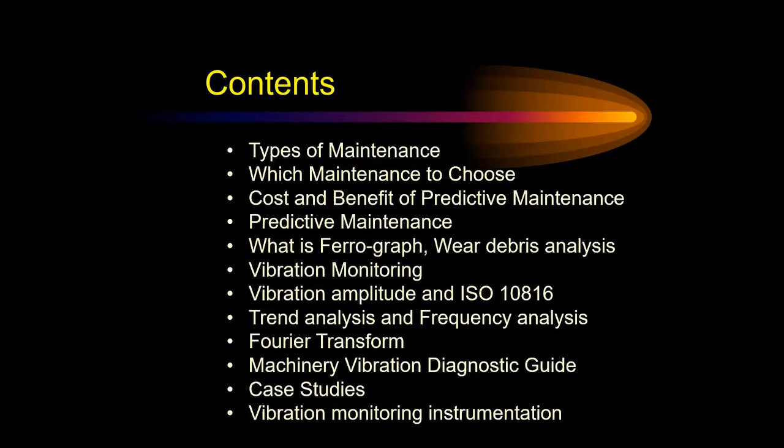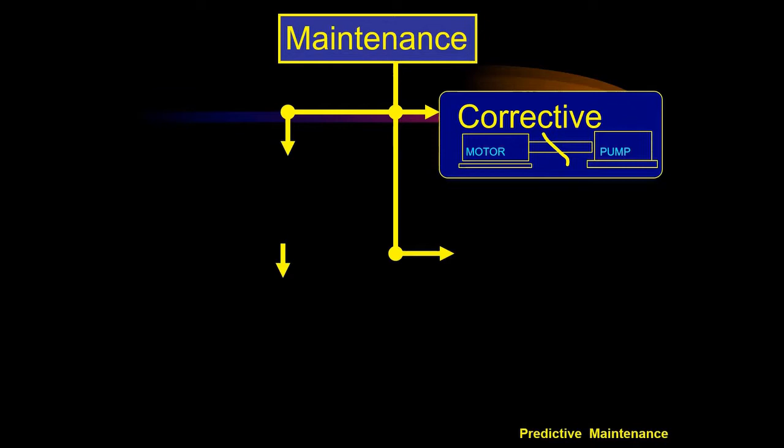Now let's see what types of maintenance there are. First is corrective maintenance, or what some people call breakdown maintenance. This means if I have a machine running, I maintain it only when it is required - when it fails, I attend to it. So this is called corrective maintenance or breakdown maintenance.

Then there is something called preventive maintenance. Most of us who have worked in the field know that we have preventive maintenance schedules. So let's say every month I will stop this machine and overhaul it, then start it again. You will have some kind of schedule for every machine - you shut it down, take it up for maintenance, and then put it back into service. This is preventive maintenance.

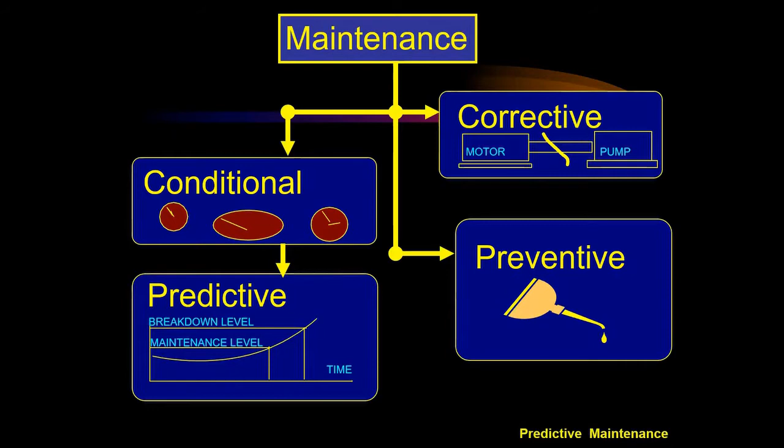Then we have something called conditional maintenance, or predictive maintenance. The idea is that you monitor the condition of your production machines, and then if required, you will maintain it. Otherwise, you allow it to run until you really have to maintain it. So these are the types of maintenance.

Now, the next question is: which machine should I choose for which type of maintenance? For example, after you finish today's webinar, you say that from tomorrow I'm going to maintain my ceiling fan by predictive maintenance.

I'm going to take a vibration meter and take a vibration reading. Your wife will say, what are you doing? Because you cannot buy a vibration meter costing maybe a lakh of rupees to maintain a fan that costs 3,000 or 4,000 rupees. So you need to know which machine should be maintained by which technology.

A fan at home is, I think, a classical example. If it breaks down, you will attend to it. Otherwise, you don't have to attend to it by any other type of maintenance. If the breakdown cost is not acceptable, or if the breakdown is important for production or security, then you have to look further.

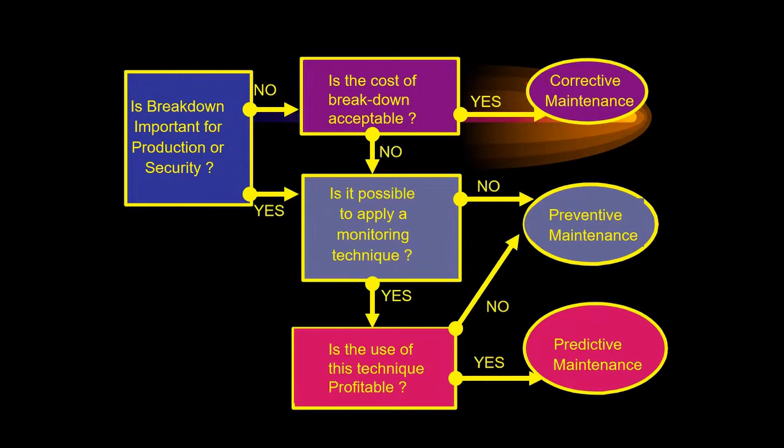Now you will have to look at the cost and benefit of any maintenance that you do. When we talk of predictive maintenance, what is going to be your cost? It's going to be the capital cost of the equipment, the training of the staff - you will have to spend money on that - and you will have to rework your maintenance procedures, which will also probably cost some money. So these are the costs involved.

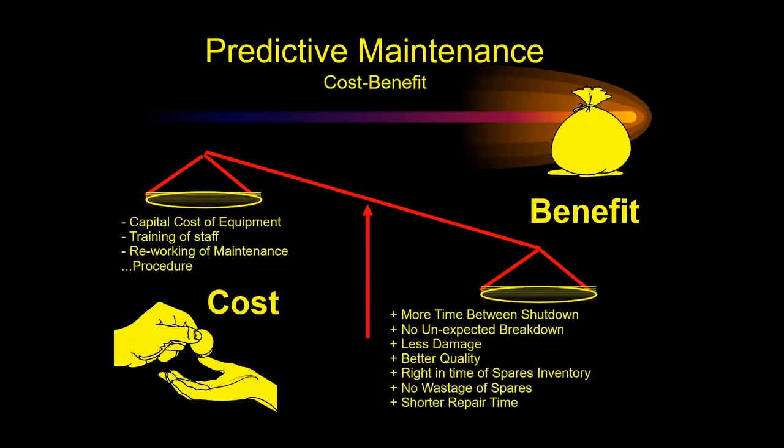At the same time, what are the benefits you will get out of it? The immediate benefits are: there will be more time between shutdowns, so maybe you don't have to take shutdowns as frequently as before. There can be no unexpected breakdowns - the machine will not break down unexpectedly since you're monitoring it regularly, so you can expect when it is going to break down. That means if you planned your production, there will be no unprecedented breakdowns and production loss will be reduced.

Less secondary damages too. Supposing your bearings have worn off and you still keep running your machine, probably your shaft will have a problem, or your foundation will have a problem - those kinds of secondary damages can also be prevented. It also means there will be better quality of maintenance and a better quality of life for the maintenance engineers.

Right in time spares inventory. If you know when the bearing is going to be required, you will get it right in time, so that you save money on holding the stock.

No wastage of spares. Now you can analyze what has gone wrong rather than doing any kind of trial and error, and then you will be able to repair your machine with the minimum number of spares required, and shorter repair time because you are now able to diagnose what is wrong.

Should I attend to the bearings or should I attend to the foundation or whatever? By monitoring these things, you will be able to achieve shorter repair time. So these are the benefits that you have.

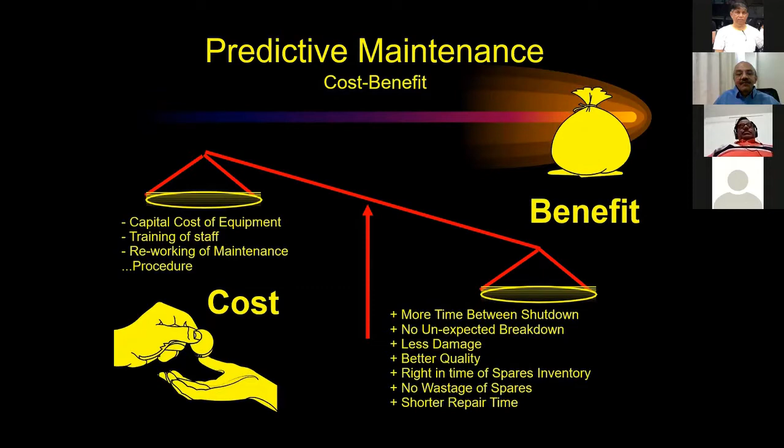Now, what are the different techniques with which you can do predictive maintenance? Some of the process parameters - on your process machines, you will have temperature monitoring, pressure monitoring, flow monitoring, current monitoring, etc. This also gives you some idea about the health of the machine. If the temperature is rising, then you know that something is wrong.

For example, in a cement plant, those cement kilns are lined up with refractory bricks. If some of these bricks are worn out, the surface temperature of the kiln starts increasing. This is a good indication that there is some problem inside the lining, and I must attend to it before it goes out of control.

Similar kind of other process parameters can be monitored to find out what is the problem with the machine. The other techniques which are quite popular - ferrograph, for example, is a graph you take for the ferrous particles, and this will tell you the wear and tear of your machine.

Similarly, wear debris analysis - these are other kinds of particles which wear out, and this can also be analyzed to find out the condition of the machine. Thermal imaging - currently we use this thermal monitoring for our body temperature, for detecting body temperature for COVID purposes. This thermal imaging is also very popular and can be used to do some kind of predictive maintenance.

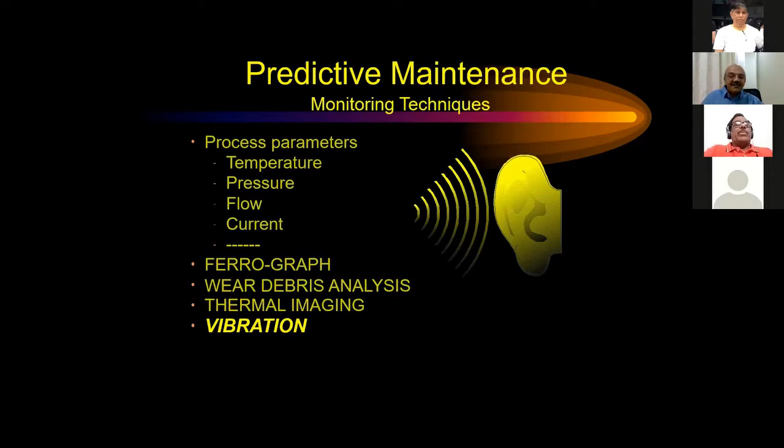And of course, the most popular one amongst all this is vibration monitoring. So vibration monitoring, we will go more into details to understand what it means.

So I will now tell you about ferrograph and wear debris analysis. Primarily, this lubricating oil is present in almost every type of rotating or reciprocating machine, and it will carry any kind of ferrous or wear particles that start wearing off.

So supposing you take a sample of this lubricating oil, just like you will draw blood for blood analysis, similarly you will draw the lubricating oil. And if you analyze it, you will find that there are some particles in it, and these particles will give you different concentration, different sizes, and different shapes.

With all this, you can come to a conclusion about what parts are wearing off, at what rate they are wearing off, and how long will it be before it really wears off so that I have to shut down the machine.

Such analysis can be done for all the types of ferrous particles and other particles with which your machine is made of. The advantage of this is that it gives a very early detection of wear and tear, and it also has a failure pattern. If you analyze this failure pattern, you can predict the life of this machine or of this particular component.

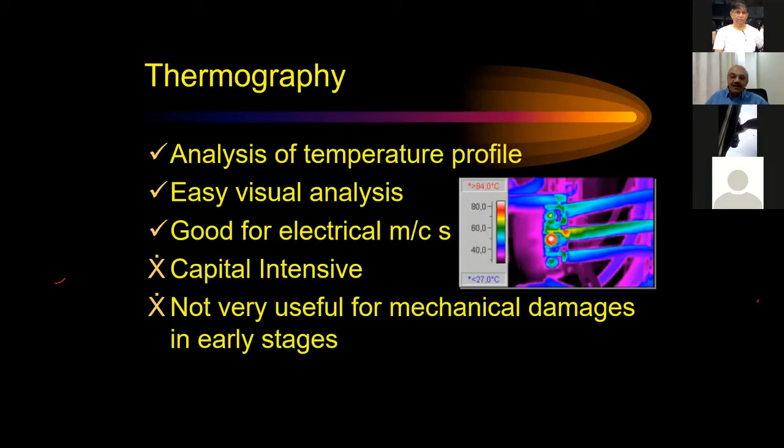Any questions so far? Okay, it's just 1 minute. I'll be muting everyone because I believe there is some kind of disturbance. And then you'll have to unmute yourself. Okay.

Yeah, I think we have done that. Okay, so I'm audible, I hope. Yes, yes. Okay, so I would go further, or maybe we can keep the questions at the last, or do you feel like... Mukesh, I have a question for you.

Sure, just go back to the testing laboratory side. You said that there is analysis of wear pattern, and you said there is a laboratory in Mumbai. Is it under government, meaning Air India control, or is it a private one? It's an Air India laboratory. Is there no third-party laboratory for this? There is one private laboratory which I know is in Hyderabad, by a company called Predictive Tech.

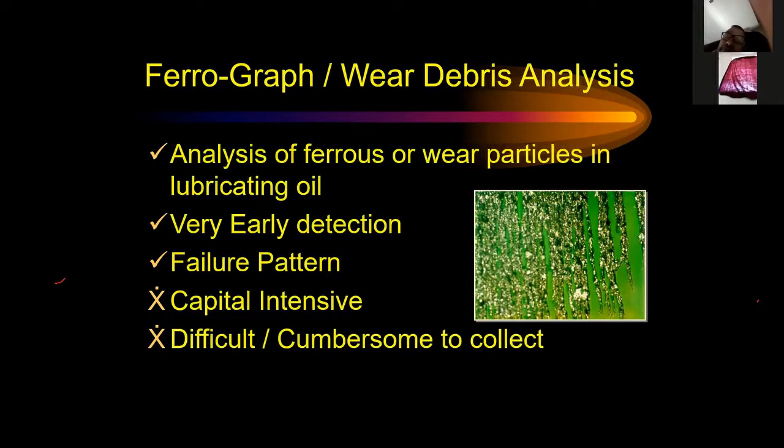But where these sets are replacing lube oil for frequent replacement, we are doing it like that. Okay, thank you very much.

Why was I asking this? Because sometimes cost is prohibitive, and instead of getting it tested, they can just go for a replacement and buy good oil. So that analysis is a must - maybe you can incorporate it.

See, replacing the oil is one part of it, but if there are some parts which are wearing off - let's say your piston and piston rings are wearing off - even if you replace the oil, maybe the vibration level will come down for that moment. But then the original problem or the root cause is the piston rings wearing off. So at some time you will have to replace the piston rings, and you should know when you are going to replace it. So this is what will be more important.

Sure, oil can of course be replaced. Oil replacement will not be that costly. Once they do our oil replacement, maybe after 1 month they can send the sample, then they may come to know.

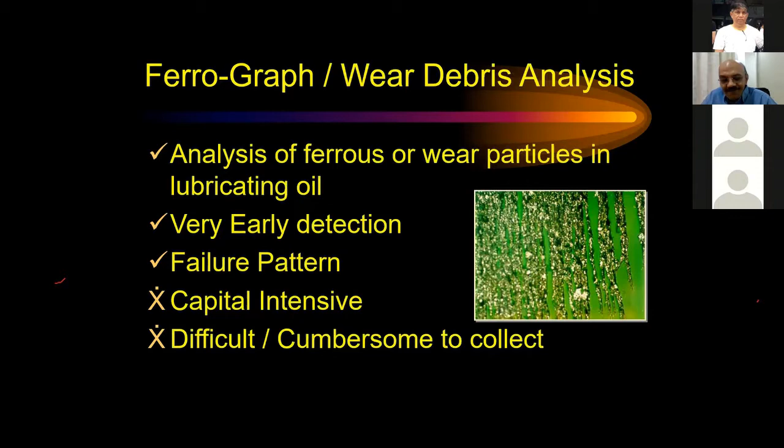Okay, so I'll go ahead from here.

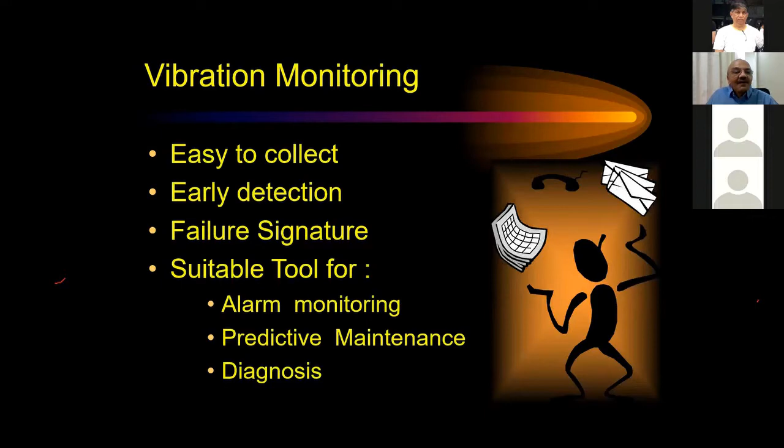So for vibration monitoring, I will give you an example, a normal medical analogy. For example, you are normally normal - so your machine, your body is normal, it's running. Then what you do is you have some signs maybe, and you would like to take your temperature. So what you do is use a thermometer, a clinical thermometer, and take a reading. What you get is one value, a number.

And these days, of course, you say that if the fever is even a low fever like 100, then maybe you have to do a COVID test, something like that. Or if it's above 102 or 103 or something, then you need to probably get admitted to the hospital.

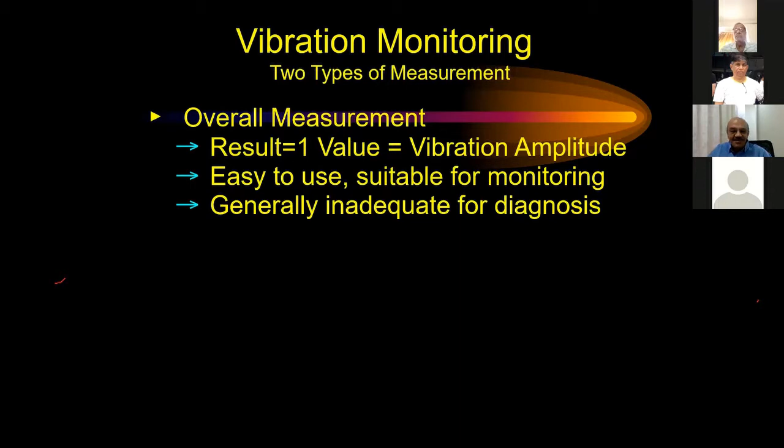And then you will compare and come to know that the machine is okay or it is in a problem. Once you know it is in a problem, then you need to know further, you will have to find out why this vibration is happening. So that is where you come to further analysis, which is frequently called frequency analysis, or also called spectrum analysis, or also called FFT. I will tell you all this further.

Now here, it's going to be a graph. Let's say a doctor takes your ECG, which is a graph, and from this graph the doctor makes an analysis of how your heart is performing. Similarly here you will have a graph, with vibration amplitude on the y-axis and frequency on the x-axis. So we call it a frequency analysis plot, or a spectrum, or an FFT spectrum.

And then from this spectrum, you can make an analysis to find out whether the bearings are getting worn out or generating this vibration, whether balancing of the rotor is required or unbalance of the rotor is generating this vibration, whether the foundation is generating this vibration, or gear mesh is generating this vibration. So depending on the type of defect, or maybe multiple types of defects, you will be able to make an analysis to find out what is wrong with your machine.

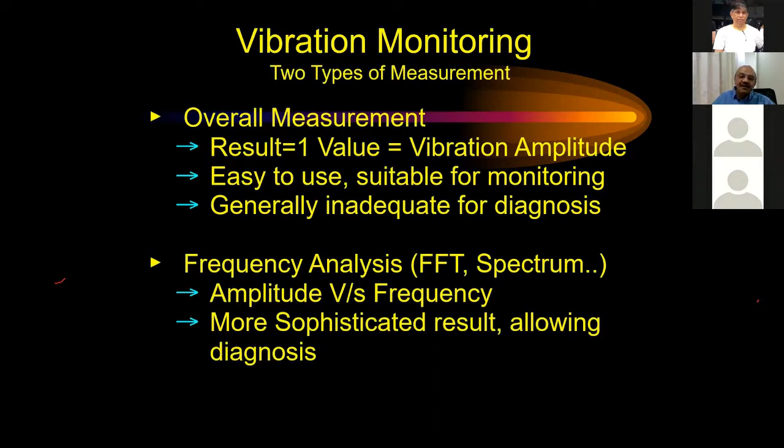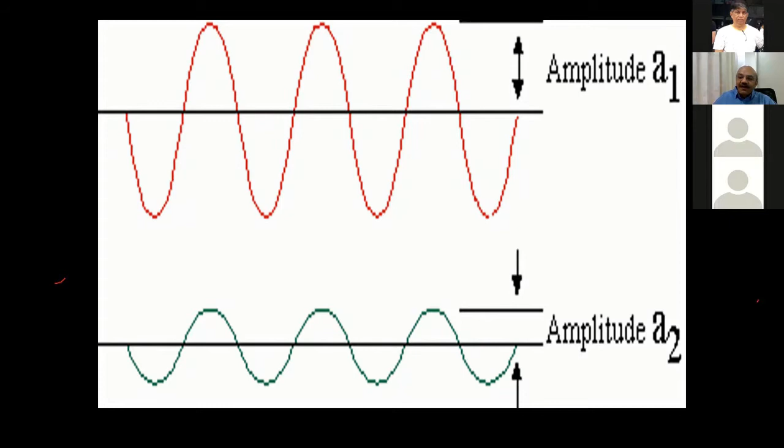Now, what is vibration? Vibration is motion. The amplitude of vibration is similar to motion. So in any kind of motion, you will have displacement. That means, let's say the body is at rest at some point, and then when it starts vibrating, it goes to one extreme, then comes back to the same rest position, and goes to the lower extreme.

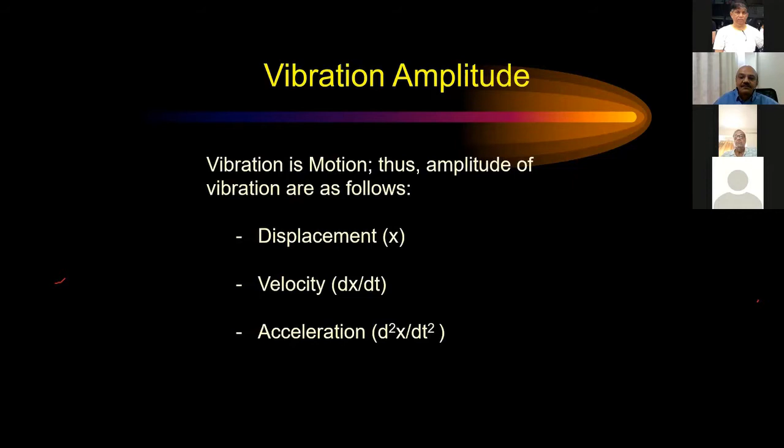Next one. Now I told you about the standard, so vibration amplitude has a standard. In fact I should show you my next slide, I think the order is a little bit of a problem. This is the first thing I should show you. So the standard example of ISO 10816 is primarily defined for mechanical vibration of machines with operating speeds from 600 to 12,000 RPM. This is where it is quite effective and normally used.

I told you about vibration displacement, velocity, and acceleration. The value it has formulated itself is based on the RMS value of the vibration velocity. So it measures the vibration velocity, your meter will measure the vibration velocity, and against that this is compared. The range is from 10 hertz to 1000 hertz, this is the frequency. And then alarm value, so again I will show you the next slide wherein those different color charts are available.

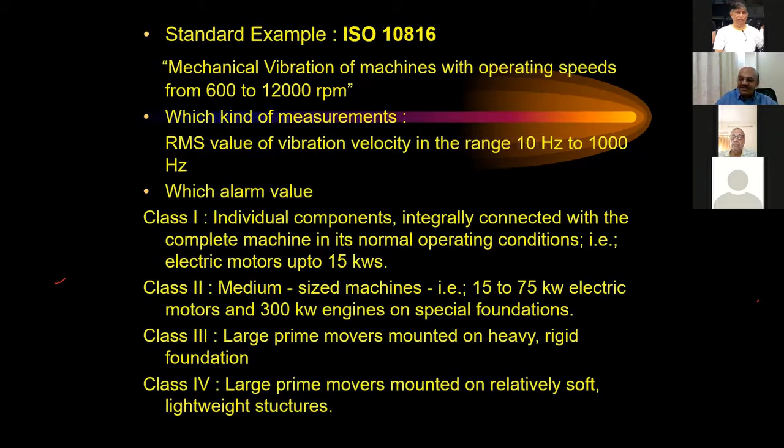Here you will see that machines are classified into 4 different classes. Class 1 is simple individual component machines, up to 15 kilowatts, this is a typical one. Medium-sized machines is class 2, from 15 to 75 kilowatt electric motors or 300 kilowatt engines on special foundations. Then large prime movers on heavy and rigid foundations is class 3. And prime movers like power station generators, these large prime movers mounted on relatively soft and lightweight structures are class 4 machines.

These are divided into different classes because, let's say, a machine which is in class 4, the value which is acceptable if you see for example the rightmost column, which is class 4, and what you see here, the arrow is visible, this green value for class 4 machine is already in a yellow value or higher area for a class 1 machine. So vibration values, or the safe values, are different for different sizes or types of machines. You have to find out which machine you are monitoring, what will be its class, and accordingly follow that particular column.

For example, if I take class 1, the RMS value of 0.71 millimeters per second is green, which is safe, it's okay. Now B is where the value started increasing. C is still an acceptable value, but you are in the alert zone. And D is something which is unacceptable, you cannot use this value, you should not run your machine in that zone.

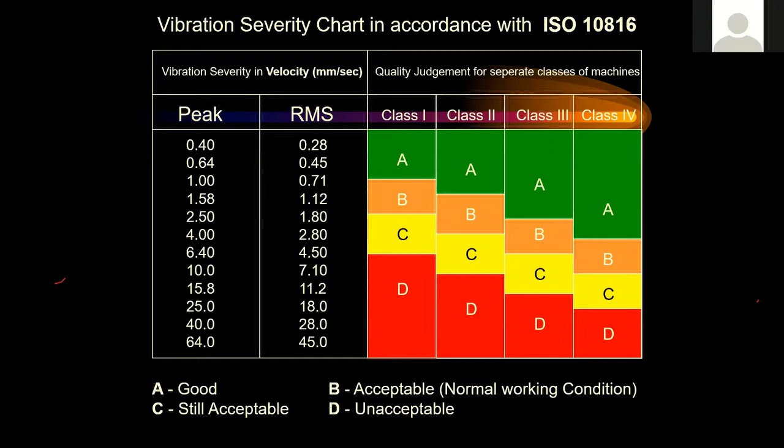So this is how you can find out that my machine is okay up to, let's say, 1.8 millimeters per second if it is a class 1 machine. 4.5 is up to that, I can still run it, but if it is above 4.5, then I should not run that machine, I should maintain it. So this is how you will read this vibration severity chart according to ISO 10816.

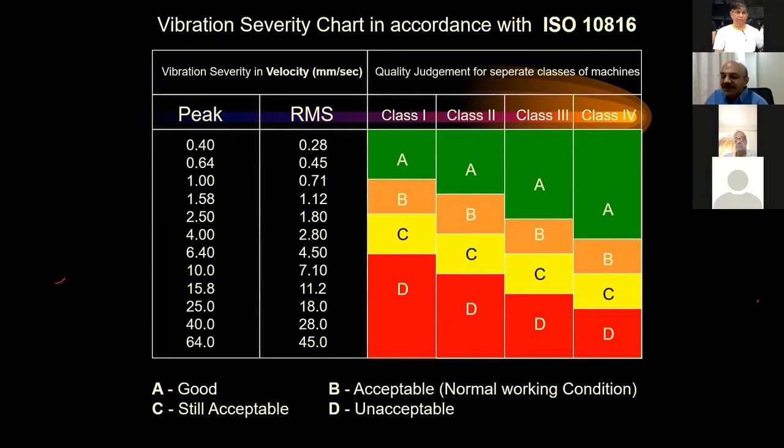This is one of the most popular standards being followed. There are instances where you may have special machines, and you may want to develop your own standards. You can also create these alert, green, yellow, and red zones yourself using some statistical tools. What you should do is take a number of readings on a good machine, and by statistical calculations, say the normal value plus one standard deviation is the alert value, and 2 times the standard deviation is the danger value, something like that. So you can formulate this kind of standard on your own, or else use one of the standards which is readily available.

After you measure the value, what you can do is simple. If you don't have anything else, you can use a standard Excel file and plot these values versus date, and you can see that there is a trend.

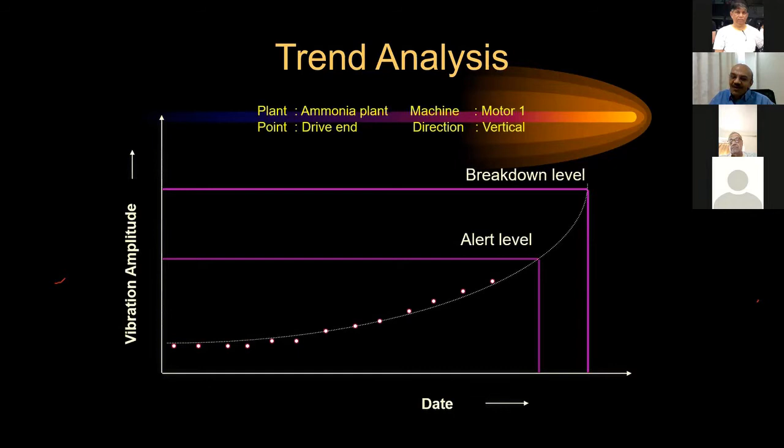So this is what they call trend analysis.

So is amplitude of vibration clear? Then we can go to the next one.

After you have determined that there is a problem with the machine, you now want to know why. What is the problem - whether it is bearings, foundation, a loose connection somewhere, misalignment, or a loose belt, depending on your machine. So you need to find out, and for finding this out, frequency analysis is going to be of help.

So what is frequency? Rate of occurrence of an event is frequency. We can say I get the bus at every 15 minutes - that's the frequency of the bus.

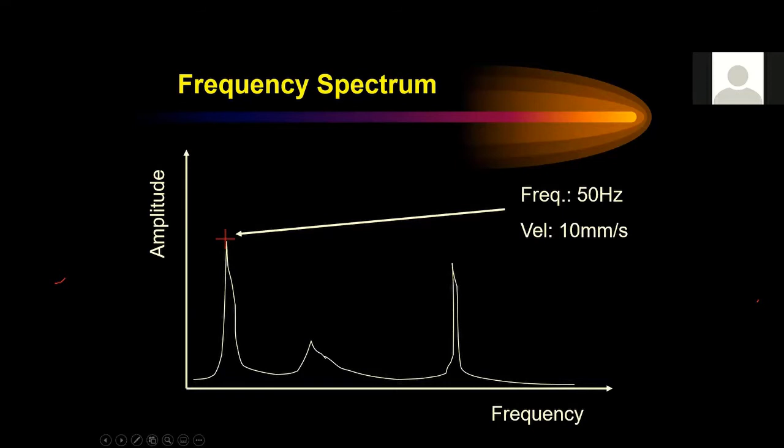Okay, now I go further. Now, how do I calculate? We just saw we cannot do this manually every time.

So you have a complex waveform, which is equivalent to waveform number 1, plus waveform number 2, plus waveform number 3, and so on, depending on how complex the waveform is. For example, if you have a square wave, it will be an infinite series of sine waves of different frequencies, all added up together to get you a square wave. So this is how you transform a time waveform into a frequency waveform, and this can be done mathematically.

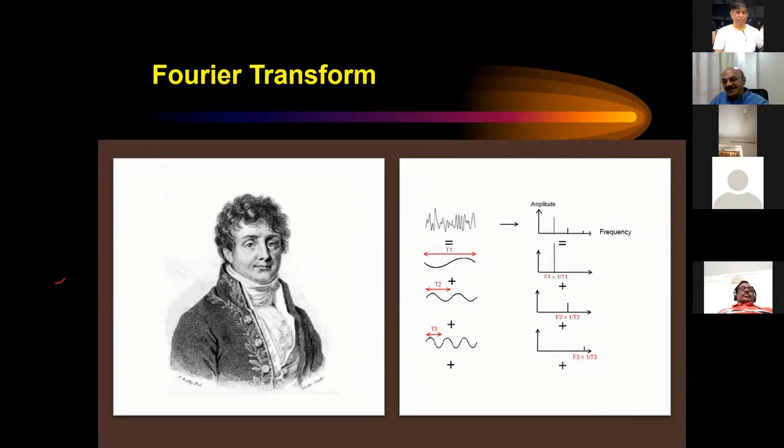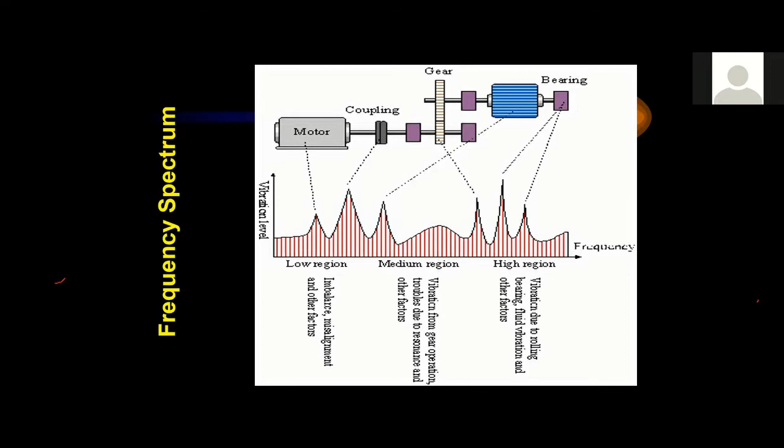Now, if you take a vibration reading, you will get different frequencies due to different components. Just some rough idea: a motor running at 1500 RPM equals 25 Hertz. So if it's 25 Hertz, I will see one peak here, depending on how much vibration the machine is producing, and I'll see the frequency here. Let's say this is generated by the motor. This is the coupling, which might have some misalignment or something like that, so it will generate another frequency here.

Let's say there is a fan which will generate another frequency here, depending on its RPM. This particular peak will be displayed. The gear will generate a higher frequency, so you have a higher frequency component seen because of the gear. Similarly, bearings will generate high frequency, and depending on the type of bearing, you will have the frequency generated, which will also be plotted on the same plot. So if you see this plot, you will see different frequency components with different amplitudes or vibrational levels.

For example, let's say this particular bearing peak is very big. Then you know that this bearing is having some problem. You have measured that the vibration is high, and then I make an analysis like this. If I see that this peak is higher, then I know it is because of this bearing, which means I should predetermine and know what frequencies will be generated by my machine.

Like a doctor knows what waveform will be generated by your heart - they talk about P, Q, R, S, and T waves on your ECG. He knows what T should be, but if T is higher, he knows what kind of ailment is wrong with your heart. Similarly, you are now a machine doctor. With this ECG, you should be able to find out which part of my machine has a problem, or how severe the problem is.

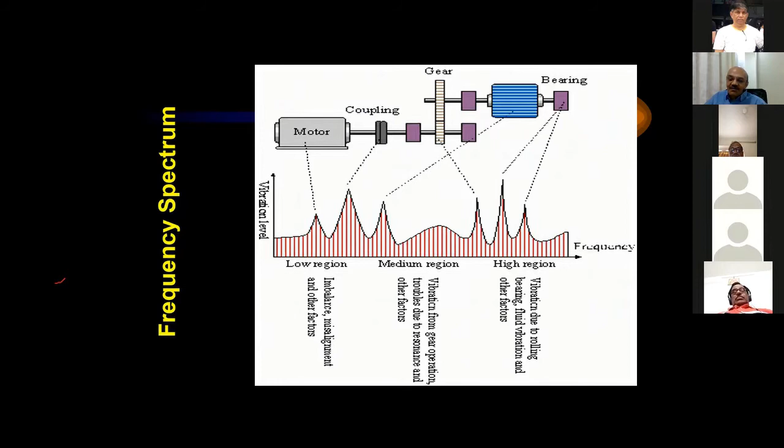Before I go further, I hope you have understood this. Now, what I'm going to show you is a chart or table which talks about the different frequencies generated by different components of machines.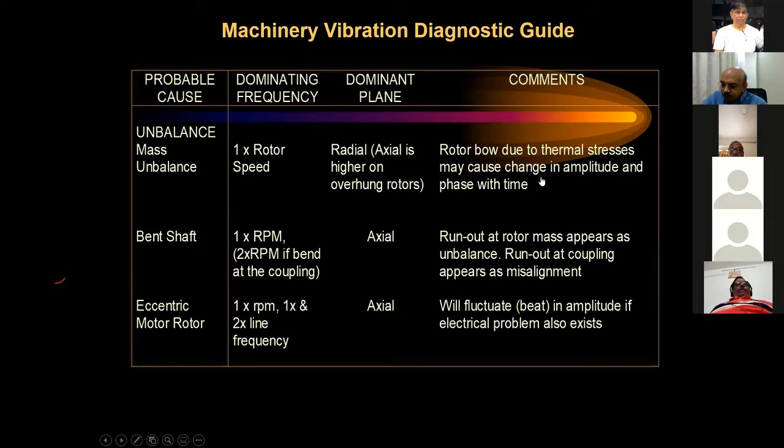For example, a bent shaft will also generate 1 into RPM, but it will be in the axial direction. Similarly, there are several of them.

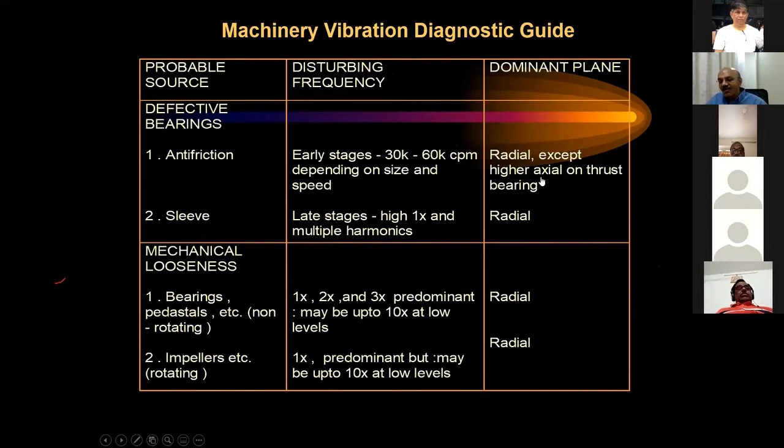So almost every type of defect which you can think about is mentioned here - different types of machines, different types of defects.

So these are the different types of frequencies which are generated by them. Frequency analysis is one of the most powerful tools used for vibration analysis.

There are other tools for vibration analysis which work together with frequency analysis. You would have heard names like orbit analysis, phase measurement, and more complicated jargon like cepstrum analysis. These exist for more complicated analysis, more complicated machines, more complicated defects. You can employ those techniques and come to a conclusion of what is the problem with my machine. These are the things which are quite commonly used. However, frequency domain analysis is the most common analysis which is being employed.

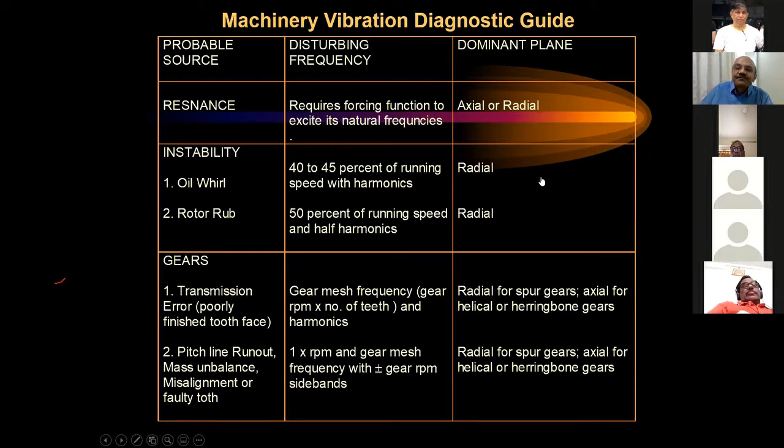I will show you some case studies. This was one at Mico Industries. Mico produces a lot of automobile components. There is something called a fuel injection valve, and this should have a very fine finish, what we call a mirror finish. In this particular case, the problem was some kind of waviness profile which was not acceptable to them, and the reason was some kind of vibration of the spindle with the grinding spindle.

This was when the frequency spectrum was taken. The RPM of this spindle was 40,000 RPM, a very high RPM machine. The peak which was seen was at almost 4,80,000. I'm simplifying by putting in exactly the figure 4,80,000; it was somewhere close to that.

And there was an anti-friction bearing here. The number of elements, I would say, were 12. You see, it was quite correlated to this: 12 times 40,000 is 4,80,000. Actually, in a practical case, there'll be a little bit of difference. Just to simplify, I've tried to mention it in this fashion.

So here, you will be able to identify that there is a problem with the bearing, and you replace the bearing, and this was done. I will talk more about this accelerometer a little bit later when I talk about instrumentation. This is kind of a sensor, and this sensor was used to monitor vibration.

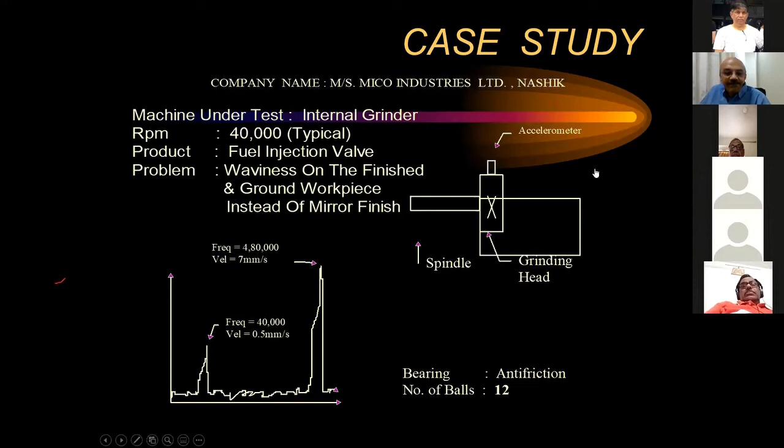The another one: this is in a steel plant. It was a gearbox which had a problem—one of the teeth was missing. This could be identified by trending the values of gear mesh frequency. When the gear meshes with each other, it generates a gear mesh frequency, and this is related directly to the number of teeth that you have. With the trending level, it was found that the tooth was initially cracked and finally broken. This could be found out and analyzed, and you could predict by which time the tooth will break or there will be a problem. So this was done, and this could be analyzed.

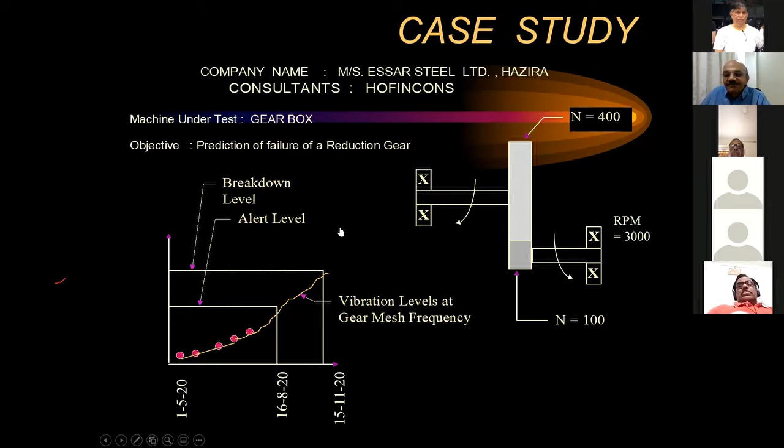There's one more: Reliance Industries at Patalganga. They had an electrical motor. Now, in this electrical motor—which normally happens, you have an electrical motor coupled to some mechanical machine—whose problem is this? Is it the electrical department or the mechanical department? Which maintenance department should take over? So for example, you have vibration, and you need to find out whether it's an electrical problem or a mechanical problem.

In this case, a very simple vibration meter, not an analyzer, is needed. In fact, a very simple vibration meter with an analog moving coil meter is good enough. Here, what you do is run the machine, mount the sensor, and monitor the value—for example, 8 millimeters per second—and then switch off the power. If the value comes down immediately, then it's an electrical problem, whereas if the value comes down gradually with the machine speed, then it's a mechanical problem. So this kind of distinguishing of which kind of problem it is can be done by a simple vibration meter.

There's one more: Mumbai Municipal Corporation. You would be surprised, or you already know, in Bhandup, Mumbai, there is a big pumping station with 14 big pumps. Each pump pumps about 110 million liters per day, which is the capacity of one pump, and they pump water to part of Mumbai city. They said that if the pump fails, we have a problem because the water supply will be reduced. In fact, out of 14 pumps, they run something like 10 or 12 at a time, so 1 or 2 pumps are always on standby. But that's a big problem if the pump fails.

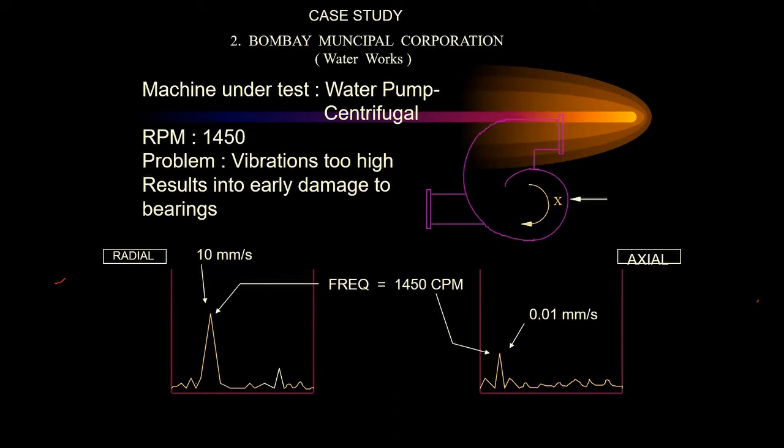Finally, we found that it had to do something with the electrical frequency, because at the time when the load was increasing, there was some deviation in the frequency. It was deviating from 50 hertz, and it used to go a little bit down. That little bit down was interacting with the number of slots of windings, and this was creating this high vibration. This is how it was finally analyzed. By then, I think there was some frequency corrector which was used, and this vibration problem was solved.

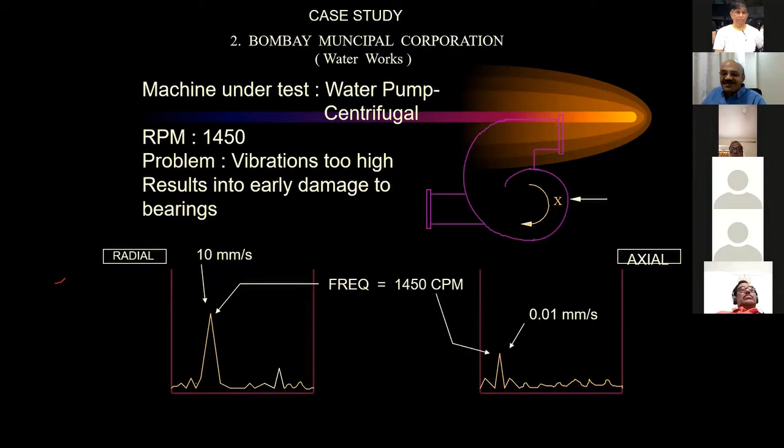So there are various such things possible. You need to monitor, you need to analyze, and then you can come to a conclusion about the reason for this kind of vibration. These were the things which I could capture. Now I think we can go to the instrumentation part of it.

So what does a vibration analysis system look like? I've just tried to pick up some simple block diagram, and I will also show some more into it. So it can have something which is a pickup or a sensor, and it may have a small cable. It will have some kind of an analyzer or a handheld device. This device may have some memory, so you can store what you are monitoring.

These days, you also get what are called intelligent vibration analyzers. These analyzers can be intelligent enough to more or less do the automatic analysis. It can tell you 80% chances that this is unbalanced, or maybe 90% chances that this is misalignment, something like that. So this kind of intelligent, handheld analyzers are available.

And then, of course, you can connect them to the PC. You can download all the data, download the reports, generate the reports and things like that. And of course, you can print them. So this could be a simple block diagram.

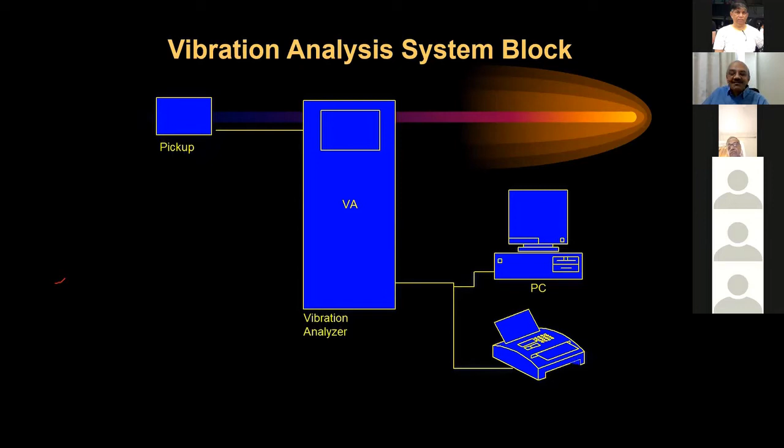What you do is you will mount the pickup like this, let's say on the bearing housing, because the bearing takes the complete load of the machine. So this is the most sensitive point where you can capture the vibration the best. You pick up the vibration there, and then this mechanical vibration is getting converted into electrical quantity, and using that cable, it gets transferred to the analyzer. And then on the analyzer, you will see the time waveform, the frequency waveform, the overall value, etc.

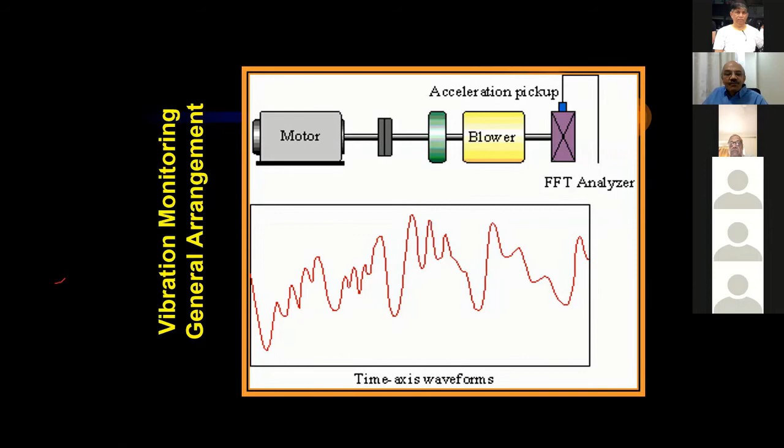So if you see, the first part of this measurement setup is a sensor, and the sensor plays a very important role. There are different types of sensors. The one which was first identified, or I would say designed or invented, was called a vibration pickup, which was primarily a magnet suspended inside a coil. This plunger, which is attached to this magnet, will be pressed onto the machine, and this will start vibrating. Because of this vibration, the magnet vibrates inside the coil, and this will generate an EMF, or a voltage, or a charge, or a current, and this is what is proportional to your vibration.

Now, this is what was there. It remained there for quite some time. It used to be a bulky pickup. I still remember early days, people used to have one person to hold the pickup, one person to hold the equipment, and the third person to write the reading. This kind of scenario used to be quite common. So this is what is called a vibration velocity pickup, because the voltage generated out of this was proportional to vibration velocity.

And that's why it was called a velocity pickup. The drawback of this was the spring, which is holding this magnet. After a while, you will see that the stiffness of the spring changes, which means you need more frequent calibration of this pickup, and ultimately there's some mechanical movement inside. So it used to be a problem, the bulk was a problem. They modified some design of this.

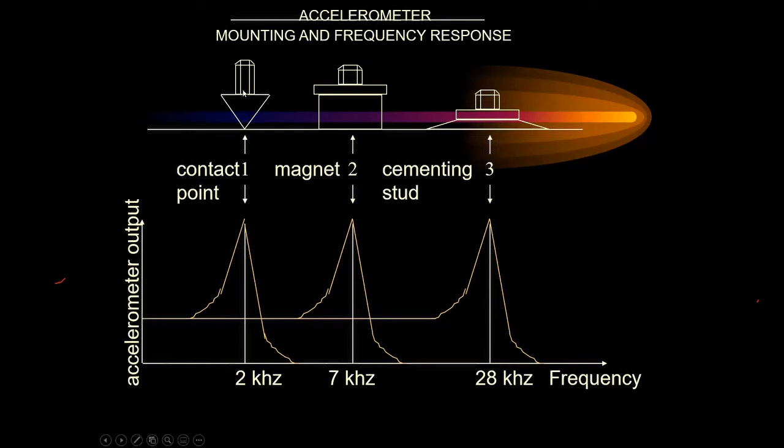Now these accelerometers, when you use them, there are different ways to use them. So for example, the simplest one will be that you have some kind of a pointer or a stud with which you can hold it by hand. This will be the quickest way to do it. However, there will be a small problem: the usable frequency range of this accelerometer will be around 2 kilohertz.

The same accelerometer, if I use a magnet and mount it, the usable frequency range goes up to 7 kilohertz. And if I use this accelerometer by cementing it, using some cementing stud and then mounting the accelerometer on that, my usable frequency range can go right up to 28 kilohertz. So the same accelerometer, but different mounting methods will give me different frequency.

Now, the first one, that is a contact point, is the easiest and fastest. The cementing stud will take longer time, but this will give you higher range, whereas the contact point will give me the lowest range.

Most commonly, people use the magnet so that it is intermediate somewhere. And most of the times, this 7 kilohertz will be good enough, unless you are monitoring very high frequency components like bearings or some high speed machines and things like that. So these are the different ways the accelerometers are mounted to take the vibration reading.

A little bit more into this to give you some idea. I will draw this. This is, let's say, a vibration meter. So you get a very small voltage or a very small current from the sensor, so you need to amplify that. So you have an amplifier.

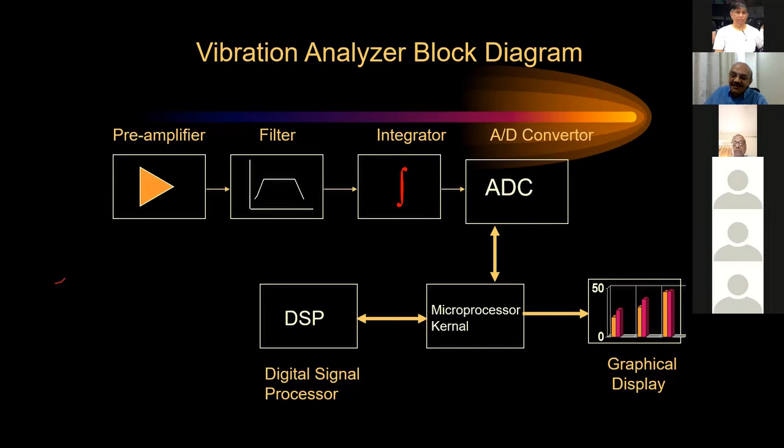So these are the possibilities of doing vibration analysis. You can also have something which is a large facility - you can have online monitoring. These online monitors will directly transfer the data using, let's say, Ethernet networks today. The analyzer, the analyst, or the expert can be sitting somewhere in the world, connected by Ethernet or the internet. You will be able to collect data at one place and do analysis at a different place, and the entire facility can be monitored. So these are the different possibilities.